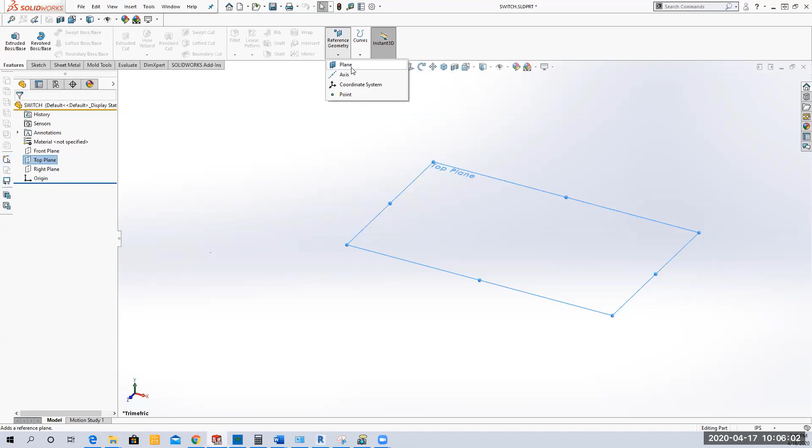All right. Now you may recall, for a loft to work properly, you need to have more than one plane. So we're going to create 2 extra planes, and we're going to make them parallel to the top plane. So I'm going to select the top plane right here in my browser, and then I'm going to go to reference geometry on my ribbon, and I'm going to select the plane tool. So I'm going to create some offset planes to that top plane. I've selected the top plane in the browser. Then I go up to the plane tool on the ribbon. I select plane, and I'm going to say I want 2 planes.

So I'm changing the number of planes, and I'm switching the offset so they're going below the existing plane. And I'm going to have them be 1 inch apart from each other. So you can kind of see that preview there, where I've got the top plane highlighted, and then I've got 2 planes being placed below it at 1 inch increments. And then I'm going to green check. So then over here, you're going to see the top plane, and then plane 1 and plane 2. And I'm going to make the top plane visible. So you see top plane, plane 1, and plane 2.

And because I'm doing a loft, and it's very easy to get lost and confused using lofts, I like to name my planes and my sketches so I can keep track of things. So I'm going to rename plane 1. I'll just press my F2 key to rename it, and I'm going to call this one middle plane. Okay, so I've got a top plane, and then I've got a middle plane, and notice it shows middle plane now for the name.

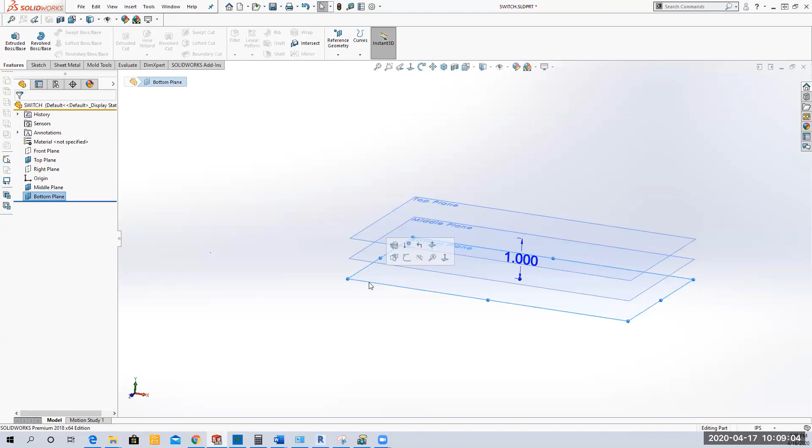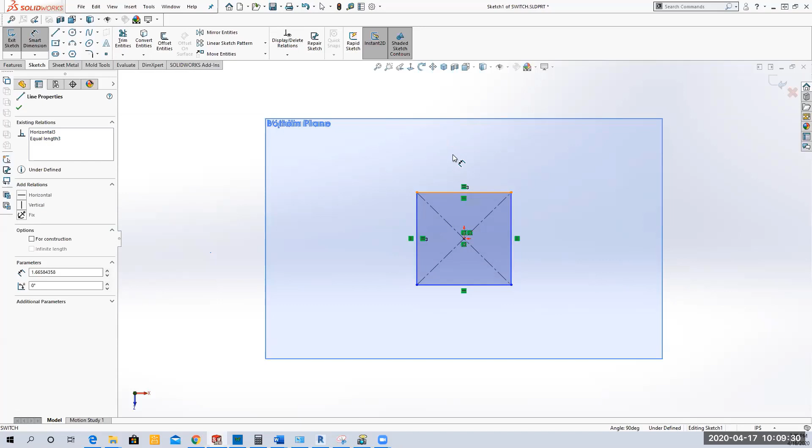And in the book, what she does is she has the planes go up, and that doesn't make sense to me because basically we're going to start down here and we're going to go up. So my first sketch is going to be on my bottom plane. Okay. So I'm going to select the bottom plane, and I'm going to say new sketch. And then I'm just going to use the center rectangle and draw a rectangle. And I want this actually to be a square. So I'm going to set the 2 sides equal. And I'm going to give it a distance of 0.5.

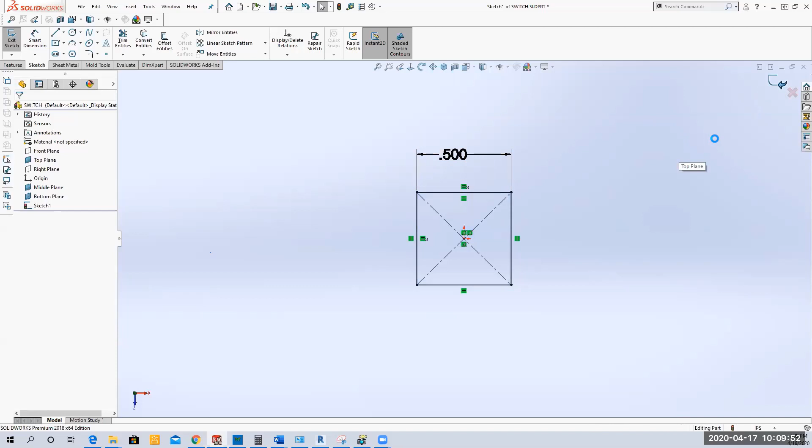And then you can see that it is fully defined because it's coincident to the center, 2 sides are equal, 0.5. And then I'm going to exit that sketch, switch back to an isometric view, and call this sketch... I'm going to call it bottom sketch.

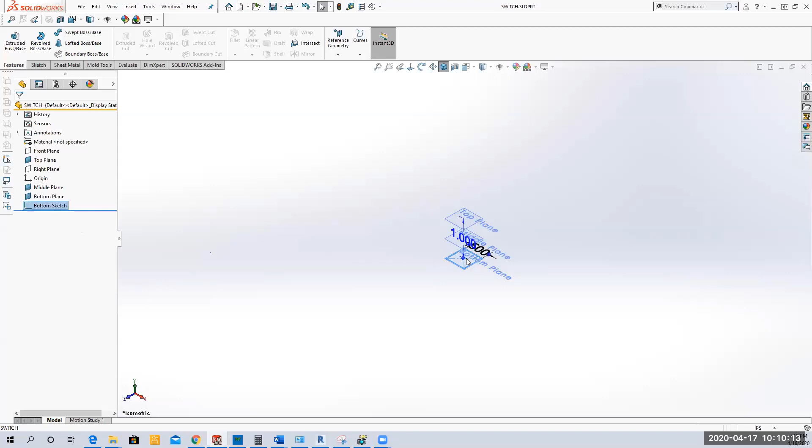Because it's on the bottom plane, and it's on the bottom. So at this point, we have 3 planes: top plane, middle plane, bottom plane, and we have a bottom sketch. Anybody lost? Anybody confused?

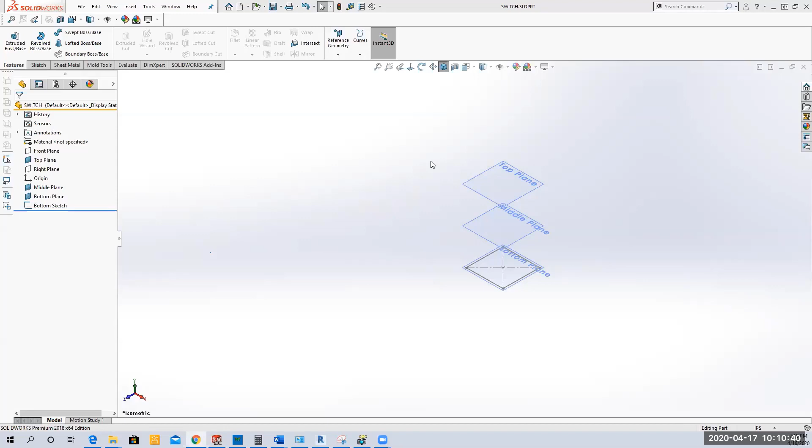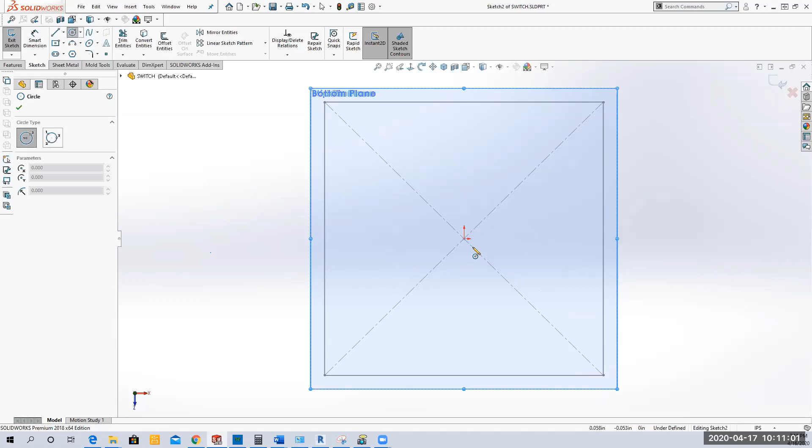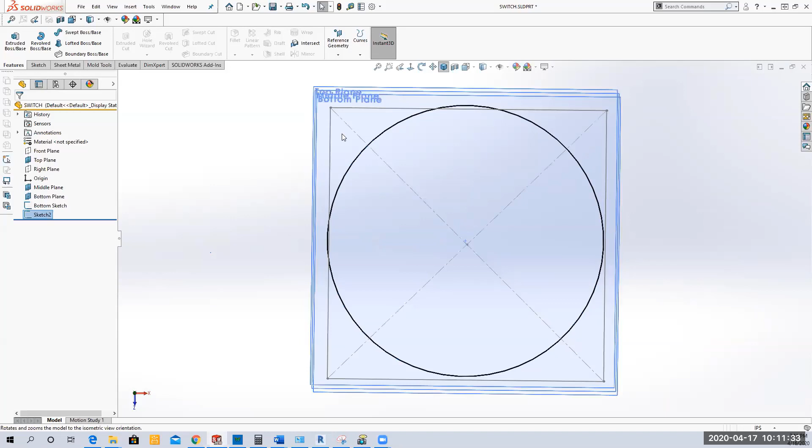Okay, now we want to place a sketch on the middle plane. I'm going to select the middle plane and go new sketch. Now I want to do a circle, but I want the size of the circle controlled by that square we just placed. So I'm going to select the circle, make it coincident to the center, then click up there and make it tangent. So I'm adding a tangent relationship between the arc and that line. So if the square changes, it's going to drive the size of the circle, because that circle always has to be tangent to the side of the square.

And I'm going to rename that sketch middle sketch, because it's on the middle plane. So far we've got 3 planes: the top plane, the middle plane, and the bottom plane. And we've got 2 sketches: the bottom sketch, which is a square that's half an inch square, and a middle sketch, which we don't have a size on, but it was fully defined because the size of the circle is driven by the size of the square. You'll see that in a minute. I'll demo it for you.

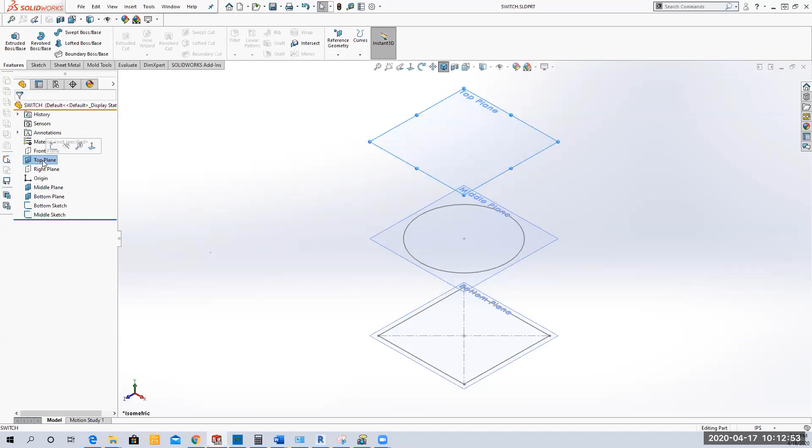Okay, so we have one more sketch, and that is, we're going to be on page 6-16, and I'm going to do the last sketch, so we'll have 3 sketches total, and that's going to be on the top plane. So I'm going to highlight the top plane, and say new sketch. And the instructions in the book are kind of confusing to follow.

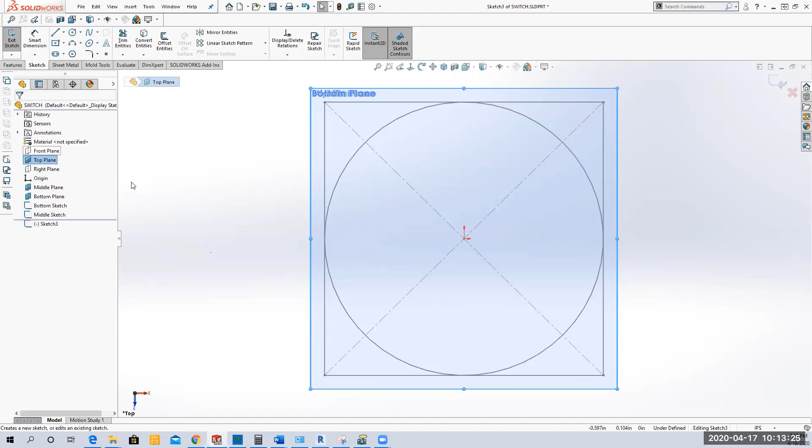What she's trying to do is create a smaller circle where she wants the size of that circle controlled by the bottom sketch. So how does she do that? First, she draws a center line. She selects the center line tool, and takes it from the center point all the way to the corner, this top upper corner. So even though I'm up on the top plane, notice I've got a coincident, and it's showing that it's coincident to that vertex of that bottom square. Do you see that? That means if the size of the square changes, the length of this center line is also going to change. So she created this relationship, if you will.

Now, the other thing she wants to do is, when we place a center circle, what are the 2 things Solidworks asks for? If I put in a center circle, it asks for the center point, which is going to be this origin here, and the radius of the circle. So I need to locate the radius point, and I want my radius point to be the midpoint of this center line. So I'm going to place a point using the point tool, right where the midpoint is. I'm going to place it right there, and notice it says midpoint when I placed it.

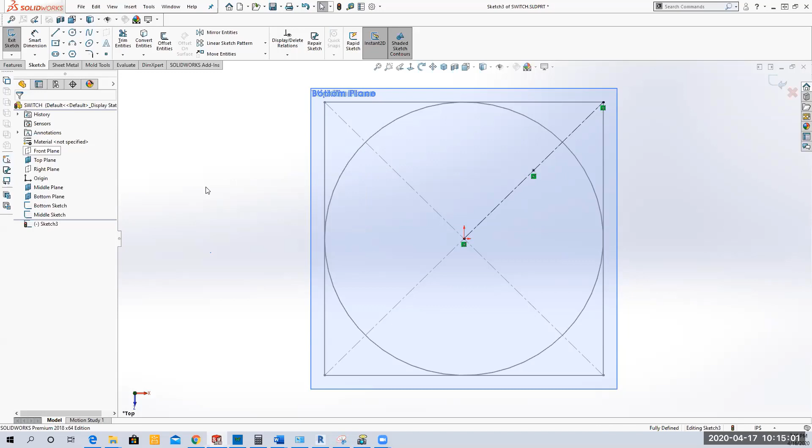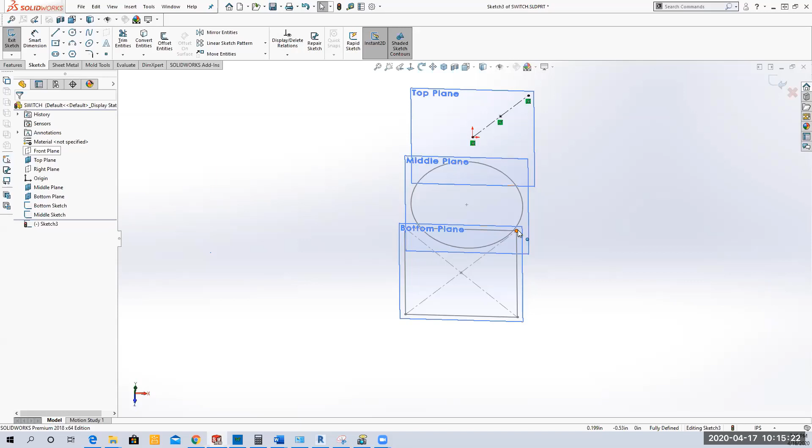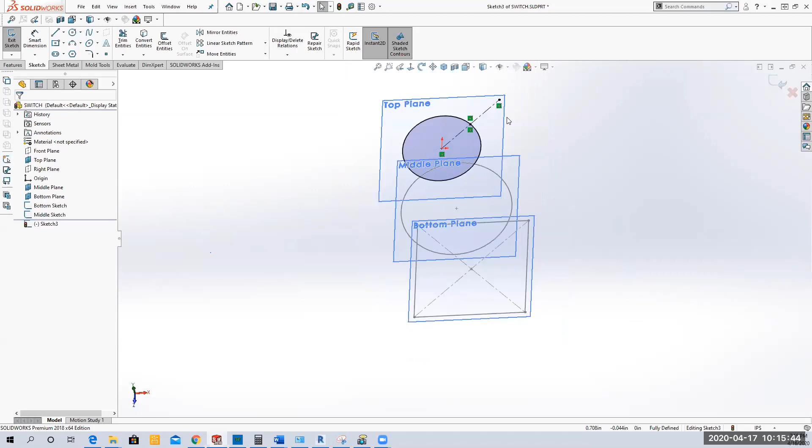All right, so notice all I've got so far is a center line and a point, and the point's located at the midpoint, and the center line starts at the origin and ends at this corner of the bottom sketch, because there's a relationship there. These 2 guys are lined up. So now I'm going to create this little circle, just like that. Notice that circle is fully defined, even though I didn't put any dimensions on it, because these 2 points had relationships there. So I'm going to exit that sketch, and rename it top sketch, because it's on the top plane.

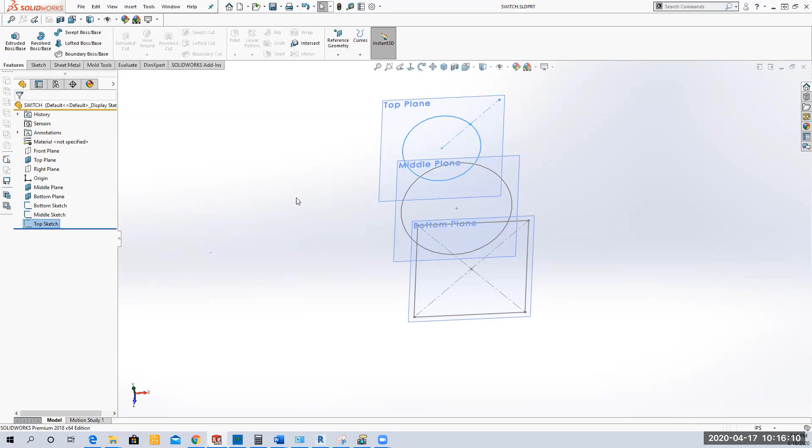And I obviously have no imagination. Okay, so I'm going to save it. And I'm going to turn off the visibility of the top, middle, and bottom planes because I don't really need them anymore. And you can see that I've got these three sketches. I've got the bottom sketch that's a square, I've got a middle sketch that's a circle, and then I've got the top sketch that's a circle.

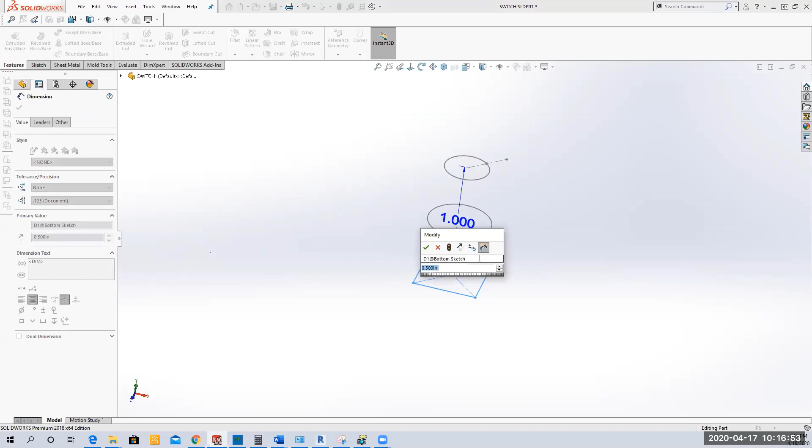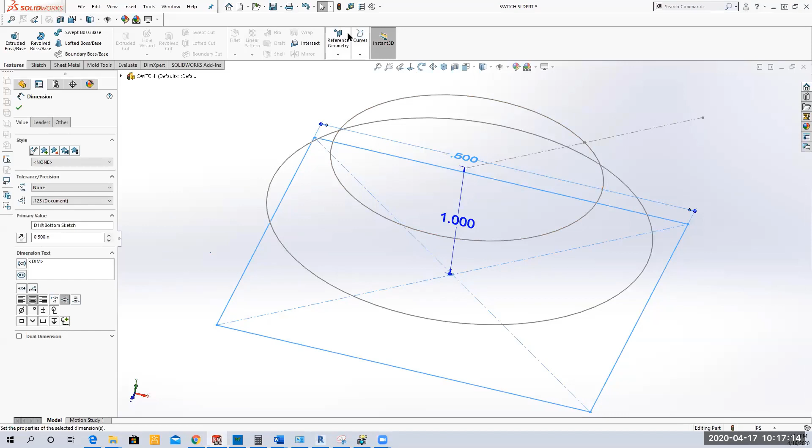Well, what if I change this dimension, this 0.5 dimension? You don't need to do it, you just need to watch me. I want to show you how the three sketches have relations with each other. So this bottom sketch is driving all three sketches. If I change this to 2 inches or 3 inches and then do a rebuild, look what happens to the other two sketches. Did you see how they got really big? Because they were controlled by the size of that bottom sketch. So if I change this back to 0.5 and do a rebuild, they go back tiny. See that? That square is controlling the size of these two circles.

And that's what these relationships were all about. Because if this circle always is going to be tangent to this line, it has to adjust the size if this size changes. Likewise, if this circle has this midpoint to this line, and this line is being driven by the length, and this distance here is based on the size of the square, this little circle is also going to adjust. So these three sketches have been designed so that they're all relating to each other.

Any questions about what I just did? Everybody's good. Okay, just did a quick pass down all the attendees.

All right, so now we're ready to do our loft. Our loft is right here, the lofted boss base. It's also called a blend, you may recall I talked about that. So I'm saying lofted boss base.

Did you have a question, Matt? No, okay. And notice you set your profiles here. Remember that PowerPoint I showed you, God knows how long ago that was, where I talked about lofts and blends? And I said you can use multiple sketches and then you can do guide curves. In the book, she doesn't show you how to do guide curves at all. Don't worry about it, because I'm going to show you how to do guide curves too. So you're going to have both, you're going to know how to do it.

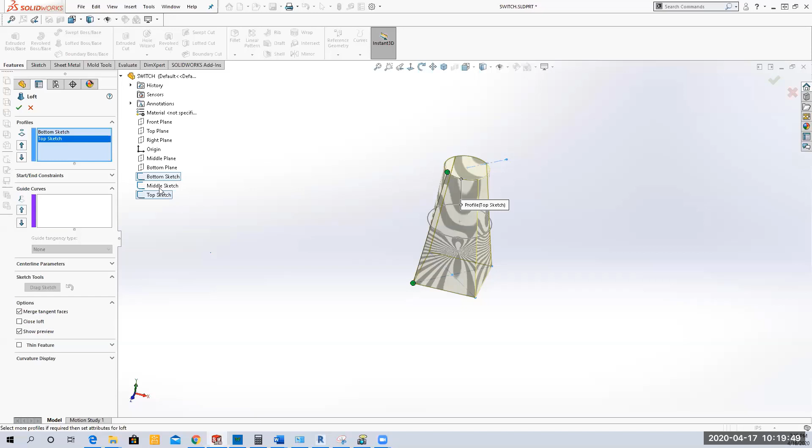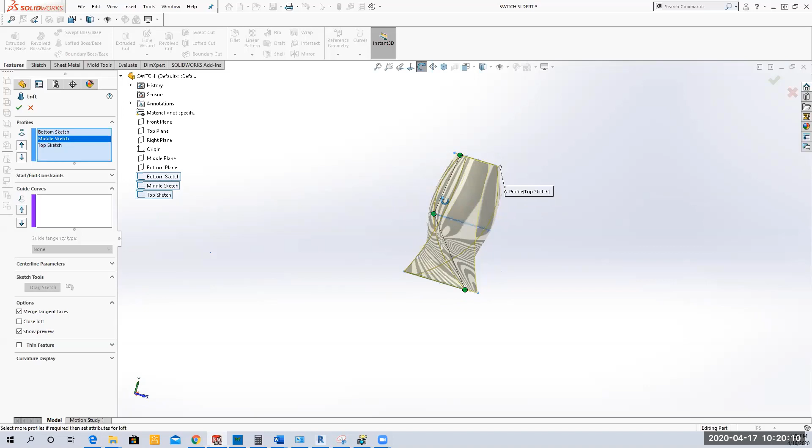So notice I have a move up and move down because the blend basically goes in the direction. And this is another thing, I can either select the sketches here or I can select them here. If I select the bottom sketch and then the top sketch, notice it gives me a nice preview, and it goes straight from the bottom to the top. But if I add the middle sketch, oops, I missed the middle sketch, notice SolidWorks gets confused because it's looping back on top of itself, so it's giving me an error. But I can use this move up key and then the middle sketch gets included, but it's all twisty, turny around. It's got these little chains to kind of help me adjust the size.

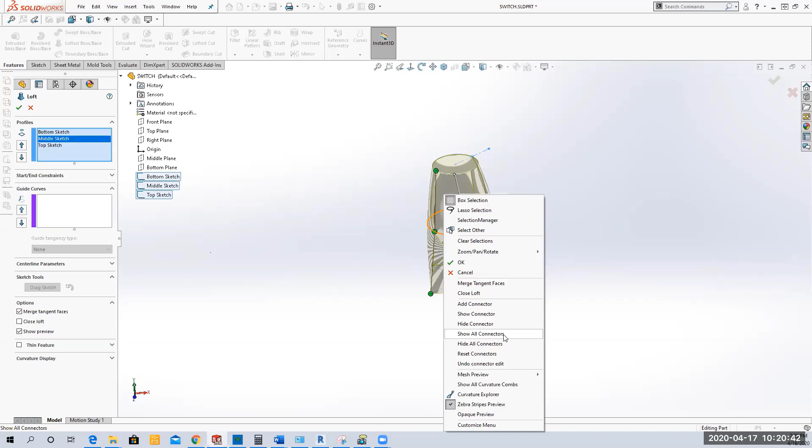Now if I want to see more of the chains, notice I can right click and say show all connectors. This is not in the book. I'll tell you right now, she doesn't show you a lot of these tricks. I want to show all connectors, so I'm going to click on that. And now I've got more connectors that I can use to adjust what my profile looks like. You can kind of move it around and it's kind of cool, so you can see what's going on.

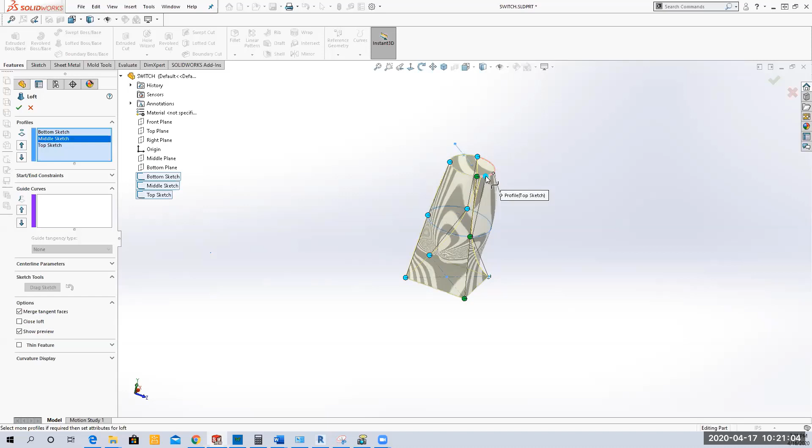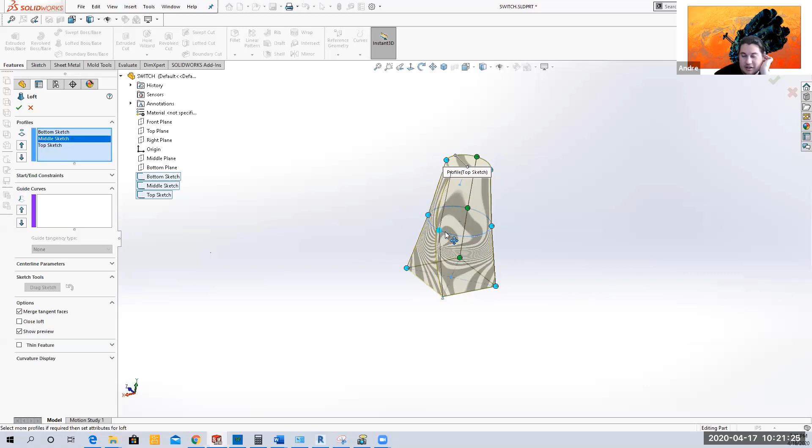I would just like to say I am so thankful you just showed me that button, because I've been lofting and basing and boundary while I was practicing the last couple weeks. That's probably the most annoying part, when multiple sketches can't connect properly. And now I have these, now I can see the curvature points or whatever you called them. Yeah, the connectors. Oh my God, thank you so much. Yeah, so stuff that she leaves out of the book, to me, is like, well, this is the fun part, right? If you don't have these connectors, they're not necessarily acting like guide curves, but I'm going to show you how to have even more control in a minute. Okay.

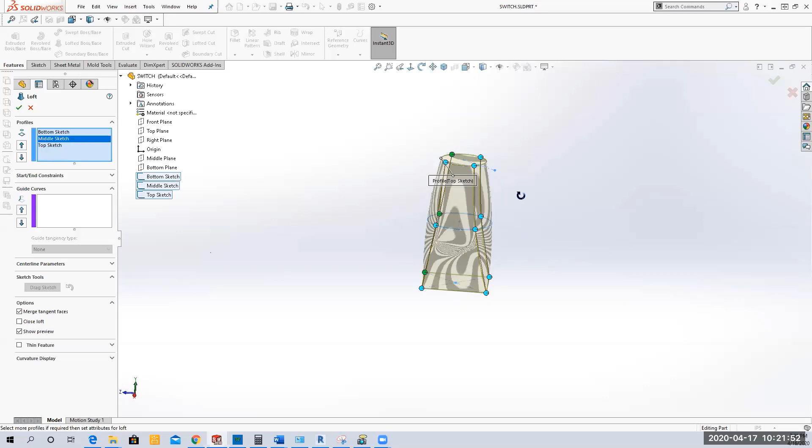This is really important when you're doing things like designing wine bottles, tennis shoes, a bike helmet, or a bicycle seat. These are all things that use lofts, and you need to have that kind of control.

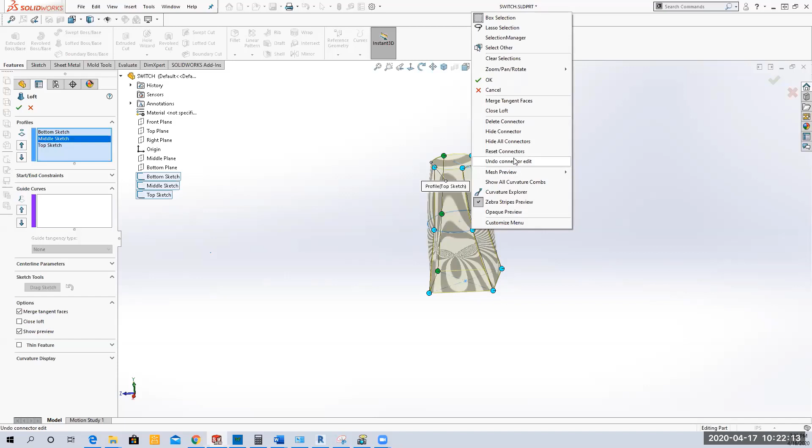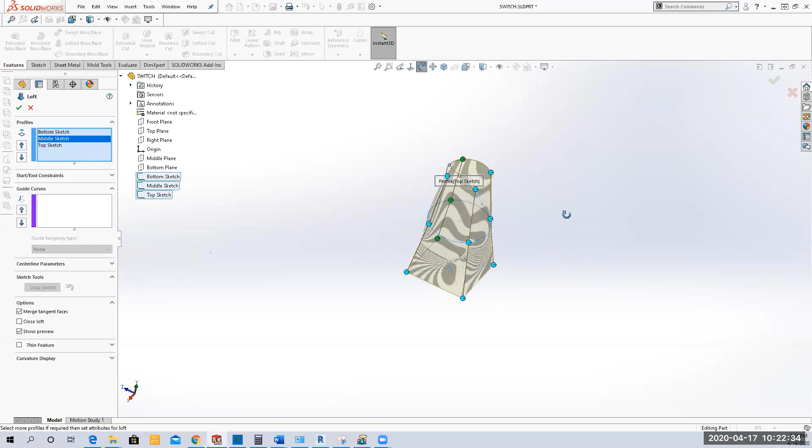So if you want to reset all the connectors, you can click reset connector, and it takes them to a default position. This is useful if you do something crazy and it looks way messed up and you can't figure out how to get out of the corner you've backed yourself into. You can just take them back to the default position, then green check. Now look how pretty it is. See that? You can use those connectors to make an adjustment.

All right, so I'm going to save. I've got my loft. At this point, you guys should have your loft, all right?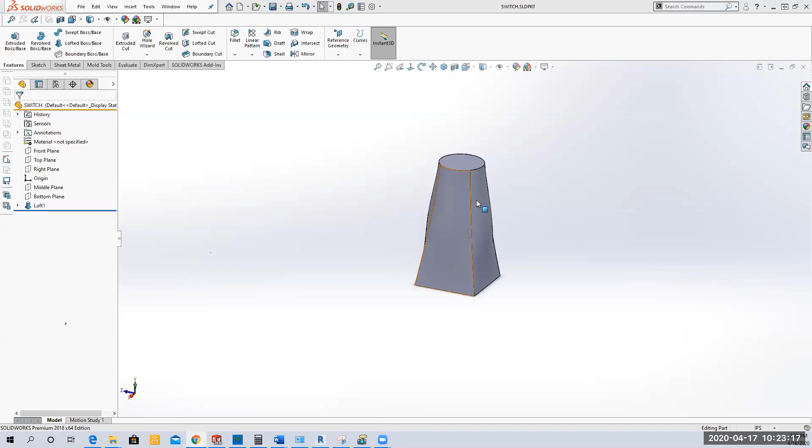And then she just finishes up on page 6-17 with a dome. We did a dome before, on the light bulb, I don't know if you remember. So it's the same thing we did before. We're going to select the top face here, and go Insert, Features, Dome.

Here's the thing, I want to uncheck where it says continuous dome, and change it to 0.2. The reason I want to uncheck continuous dome is because this is a loft. If you have continuous dome enabled - and she doesn't talk about this in the book - it's going to attempt to keep the dome tangent to the surfaces leading up to the dome, and that can create issues.

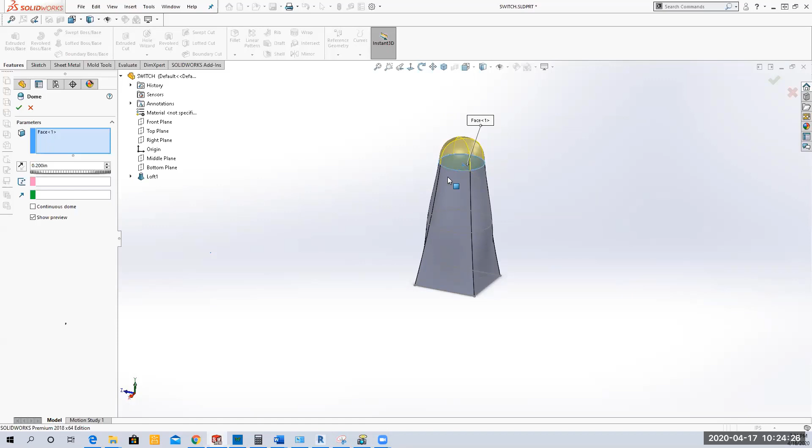So if you want it to look a little cleaner with a loft, it's usually better to uncheck continuous dome. I'm going to check right there, and there's my switch. So this is the way the switch looks in the book. And that would basically be the part, and this is where I would normally just say okay, we're done, and we can stop talking, blah blah blah.

But I want to show you how to do guide curves, because that's not in the book, and that's something I think is very useful, especially if you're going to do anything with a lot of lofts. So now I'm off script, and you're going to have to pay closer attention.

Now, you don't have to follow me, you don't have to do anything with me at this point, because you've got your switch part. This is all you need for your drawing. Make sure you look at Canvas for what I want you to do for your drawing, because the drawing is cinchy easy, just 3 views, okay, and a minimal amount of dimensioning because it's a lofted part. So make sure you check with Canvas before you do the drawing on this.

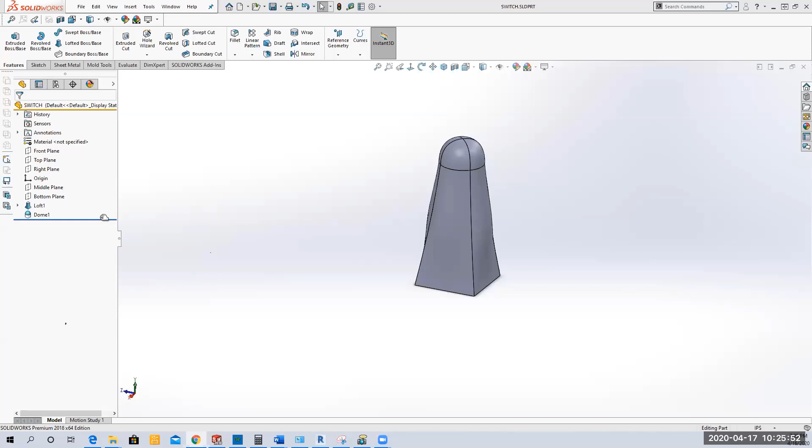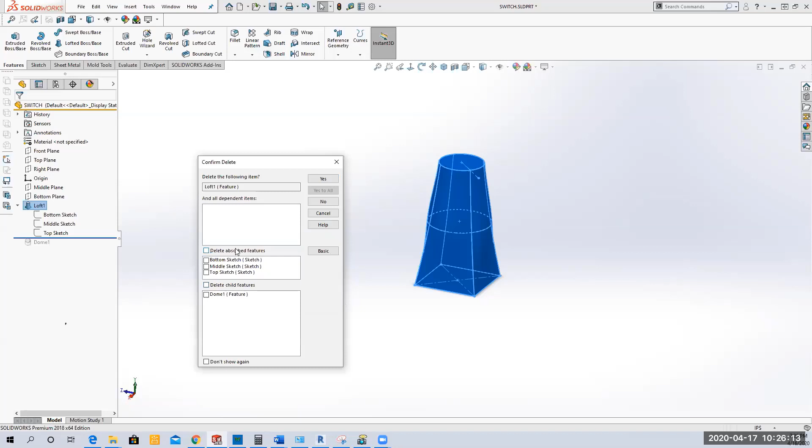So first I'm going to roll back the dome, okay, and then I'm going to delete this loft. And I don't want to delete the child feature. Will it let me? Don't want to delete... well, it's going to do it, so I'm just going to let it. Okay, so nope, it saved the dome.

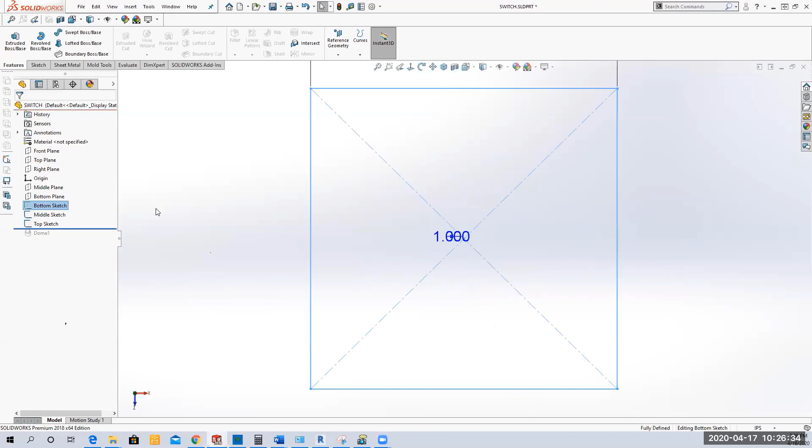So I've got my bottom sketch, middle sketch, top sketch again. But I want to do my guide curves. So what I'm going to do is go to my bottom sketch first, and I'm going to add a point in the middle of each of these lines. The reason I want to do that is so I have coincident points, or hooks if you will, for my guide curve. And I'm going to do the same thing on the circle.

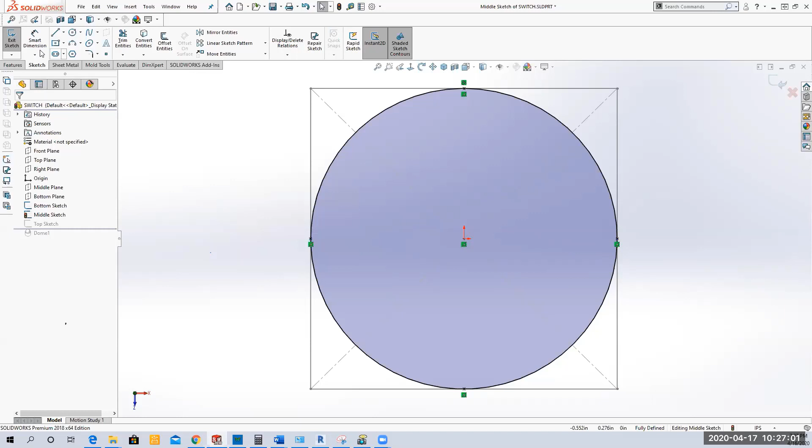I'm going to add points at the 4 quadrants of the circle, and I'm going to do that on my top sketch too. I'm going to draw a point at each of the 4 quadrants.

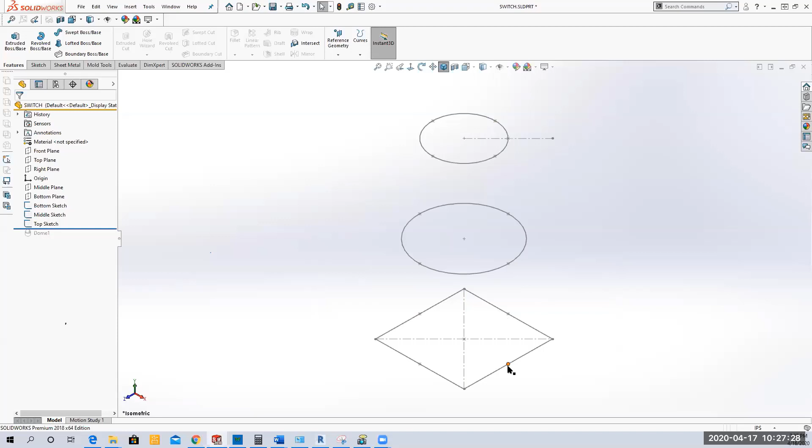And you can have as many guide curves as you want. I'm going to switch to an isometric view so you can see - I've got those 4 points on each side, do you see that? And the reason I put them there is, see how they're lined up with the right plane and the front plane? So now I can use the right plane and the front plane for my sketches, for my guide curves. That makes it a little bit easier for me.

Now, the more guide curves you have, the more you can define your geometry. So if I wanted to, I could say that I want a plane angled to the front plane, and there, I want an angle of 15.

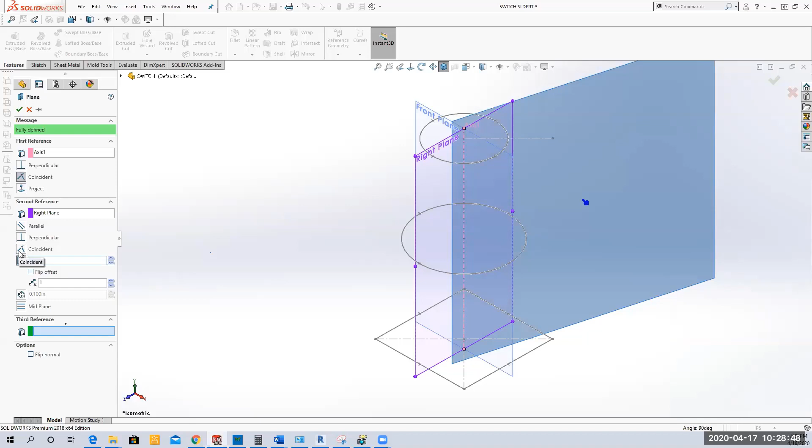Okay, I probably need to do an axis between these two guys. All right. And then I'm going to have to do a plane between the axis and the right plane. And if I wanted to do like 15 degrees, there's my 15-degree plane. So I could have a guide curve on this 15-degree plane, but then I need to add points all along that so that it has a hook to it.

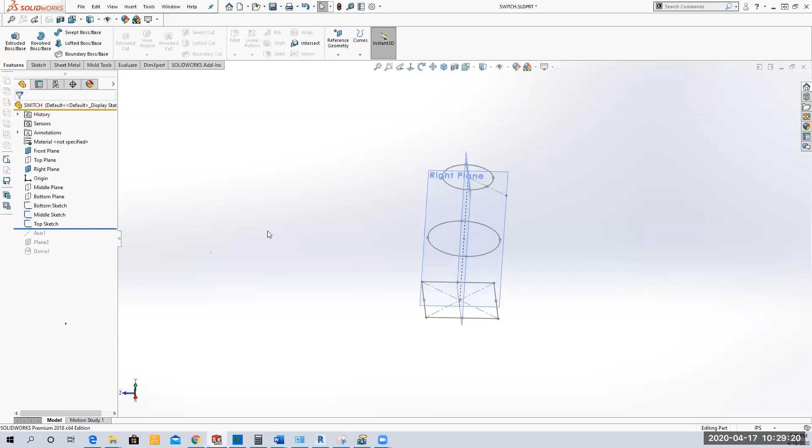So that's a little more complicated than I necessarily want to get, but obviously the more guide curves you have, the more control you have in how it's gonna look. So I'm gonna move that up a little bit, okay? So I'm just gonna do the right plane and the front plane. I didn't delete plane 3 just in case somebody decides to be a wise guy and asks me to use that extra plane and to see how it's gonna look.

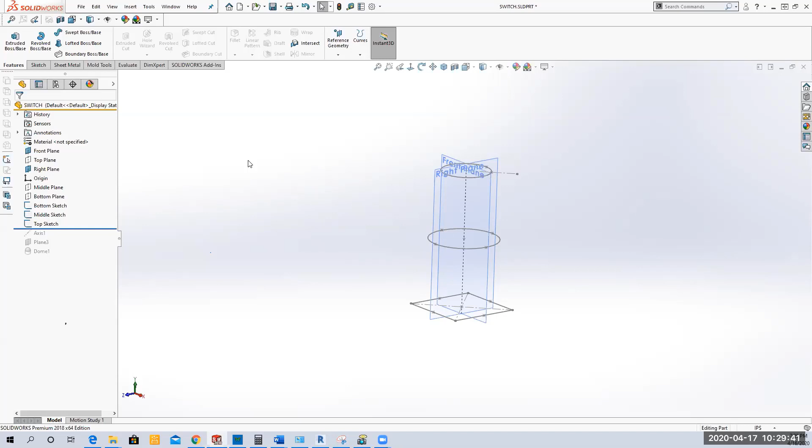So remember the rules for guide curves: 1 guide curve per sketch. Okay, this is where a lot of people get messed up. So I'm gonna start on the front plane. I'm gonna go new sketch. And I'm gonna use the line tool, and I'm gonna draw a line from here to here to here. And I'm gonna exit out. And I'm gonna call this guide curve 1. Okay, and you see how it's connecting to this point, and this point.

All right, so this is where a lot of people think they're gonna get cute, and they're gonna say, well, why don't I just mirror this line over to the other side on the front plane? Because then I'd have less work, right? Except remember, the rule is 1 guide curve per sketch. So you can't do that.

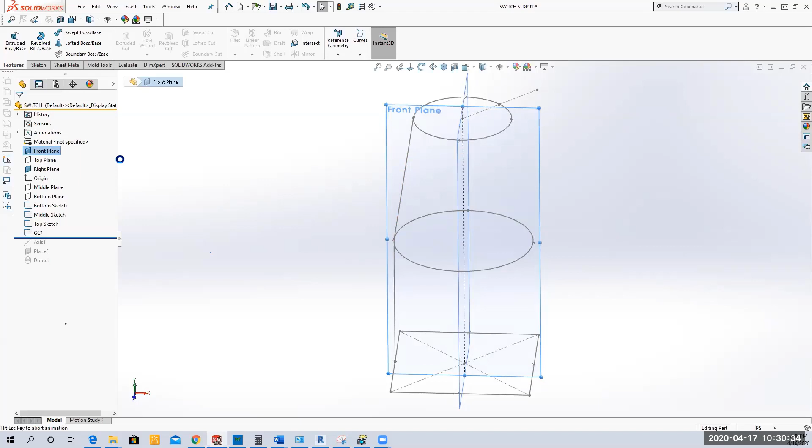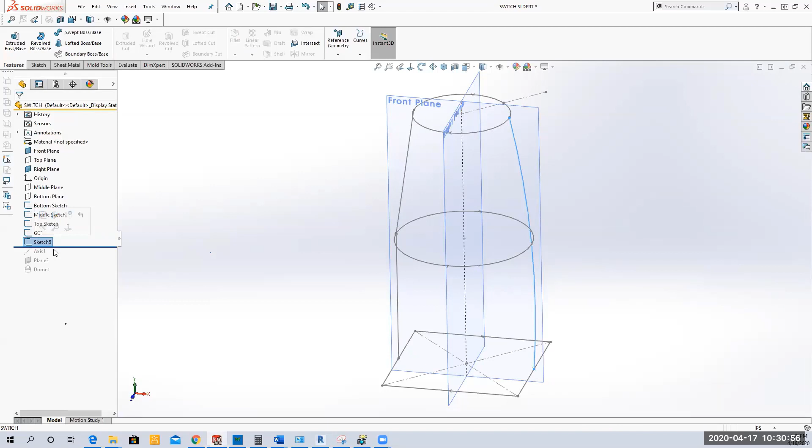Okay, so I'm gonna go front plane again, and this time I'm gonna do a 3-point arc. So I'll say I'm gonna go from here, okay, to here, to there. Okay, there's my 3-point arc, and I've got a line. I'm gonna exit that, and I'm gonna call that guide curve 2. Okay, so now I've got 2 guide curves.

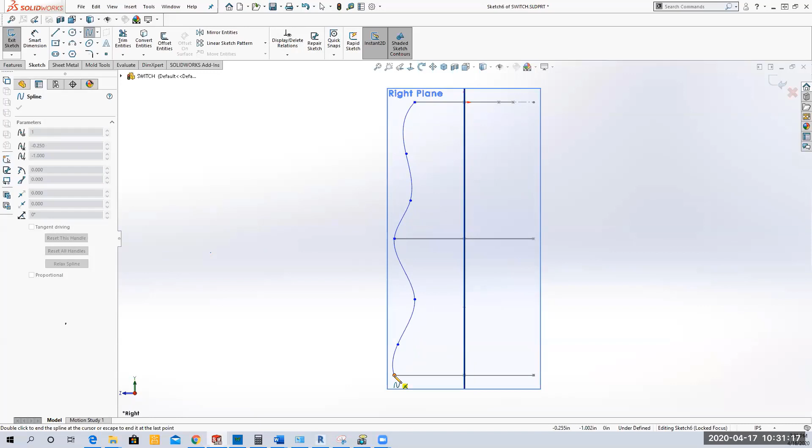Now I'm gonna go to the right plane. I'm gonna do a new sketch, and this time I'm gonna do a spline. So I'll get very cutesy. Okay, so this is the Coca-Cola bottle, right? Or the Pepsi bottle, you know, or liquor bottles, right? They get more interesting with their shapes. I'm gonna exit that, and I'm gonna call that guide curve 3.

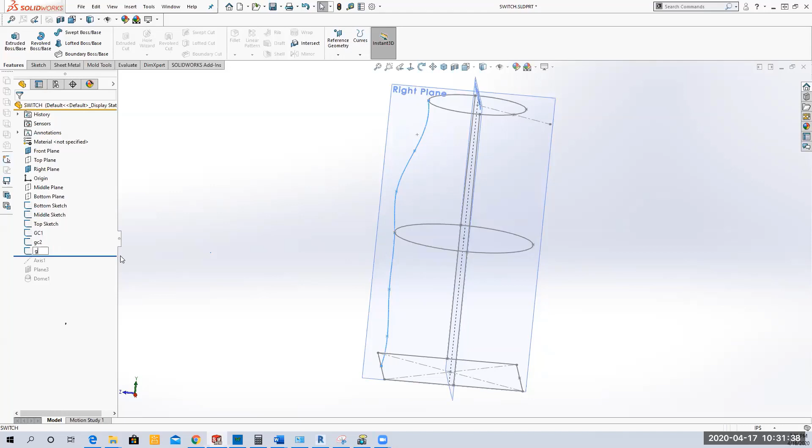Okay, and I can do 1 more guide curve, and I normally leave it up to the class if it'll be a line, an arc, or a spline. So I think I can do a poll. I'm going to ask a question. Okay, poll 1. Guide curve 4. What should I use for my 4th guide curve? A line, an arc, or a spline.

Alrighty. And there it is. Where's my poll? Okay. There's my poll. Trying to... poll 1. How do I present it? Let's see. And that was my question. So how do I get that poll out to you guys? Let's see. There it is. Save. And delete question 2. Save. Okay. So I've created a poll. Launch polling.

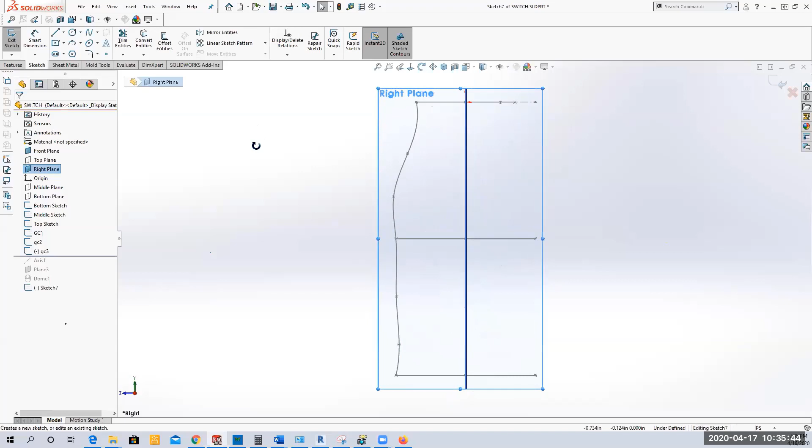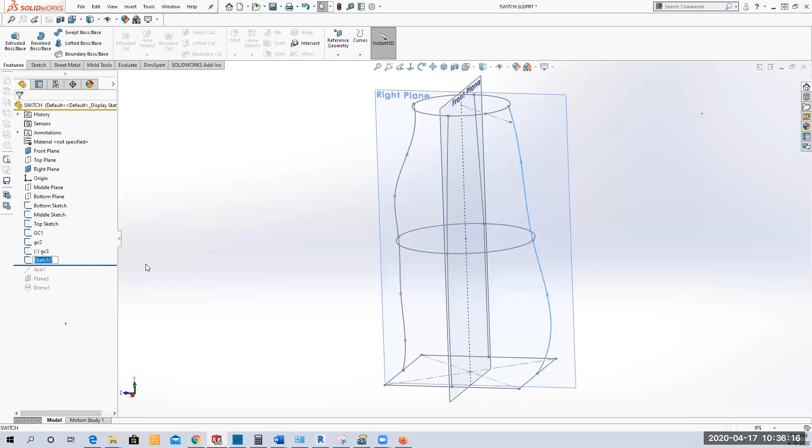Okay, so I'm going to go to the right plane, do a new sketch, and draw another spline. When you did the sketches for the guide curves, did you just keep on re-clicking right and front plane? Yeah, I just had to select each plane. Remember, each guide curve has to be in its own sketch. So I had to each time select the plane that I was going to place the sketch on and then draw that sketch. Yeah, I just missed that very beginning part. But okay, just re-click. Yeah, every guide curve is its own unique sketch. So I've got 4 separate sketches there.

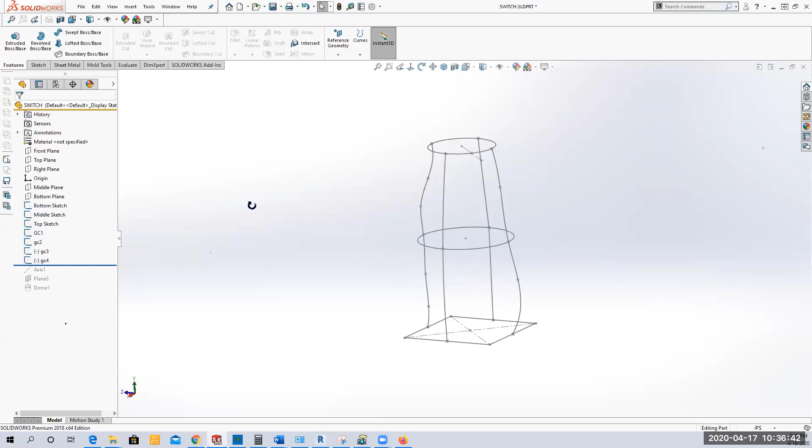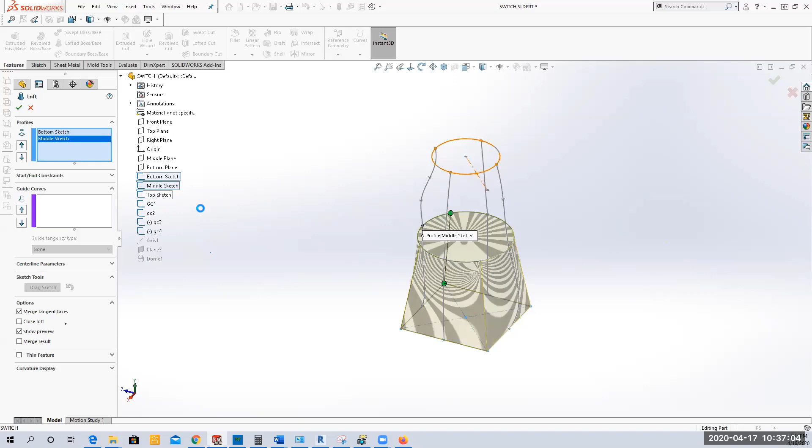All right, so now when I do my loft, once again, I select my profiles. So I select my bottom sketch, middle sketch, top sketch. Okay, but notice it's kind of ignoring the guide curves. I don't know if you can see that. See how it's not doing anything with these guide curves here? Okay, so what I'm going to do is add the guide curves down here.

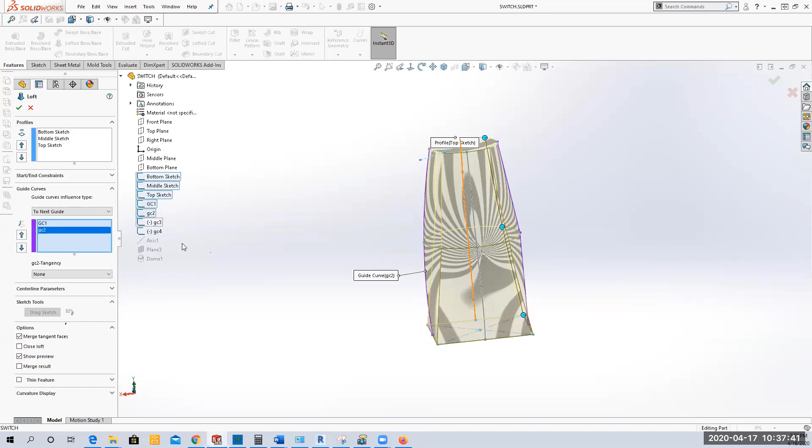I'm going to select guide curve 1, and notice as soon as I select guide curve 1, do you see how it's using that guide curve to change the profile over here? And then I'm going to add guide curve 2. See how this guide curve changed the profile? Now guide curve 3. See that? And then guide curve 4. See that? And then I'm going to green check. See the difference?

This is where you do a hair blow dryer, a hair dryer, right? Or a shaver or razor. Those are shapes that are created using Loft. Okay, so it gives you a lot more help.

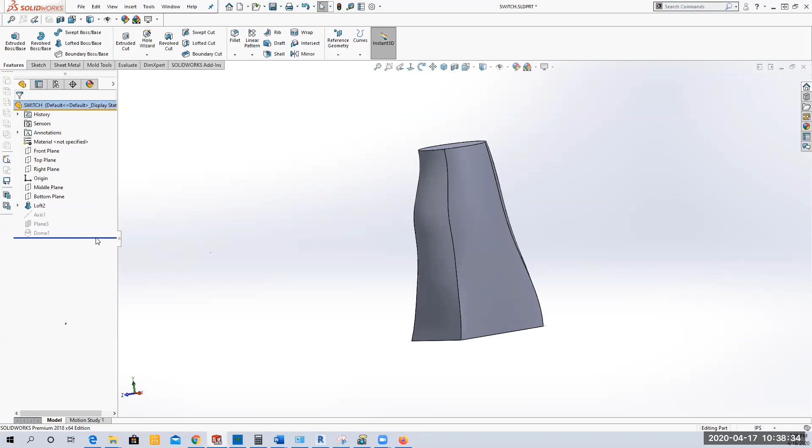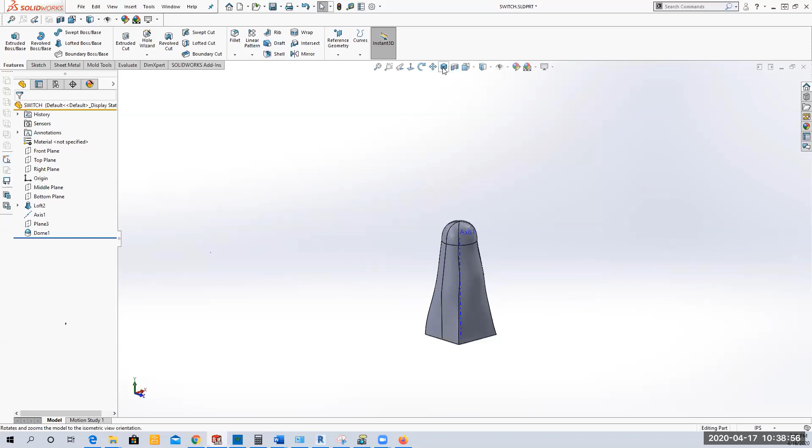So then I can just come down, and my dome, I need to reselect that face because that face went away. And there's my dome. Okay. Whoops, I don't need that sketch. I don't want to sketch there. So now you can kind of see the value of guide curves, right?

And that's basically the switch. How exciting that is. You know, I redid the whole exercise just now really quickly just to do that. And I put in my guide curves and everything, and actually it said loft operation failed to complete.

Okay, so the first thing I'd want to know is, one, if each guide curve is its own sketch. And the second thing is, remember, it won't work if you don't do these in the right order. So if you did top sketch, bottom sketch, and then middle sketch, it doesn't like it. Is that the same for the guide curves too? The guide curves, it doesn't really care what order you do the guide curves.

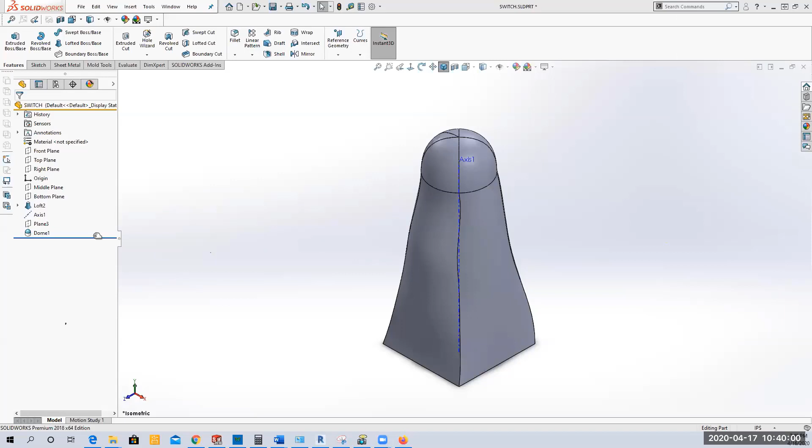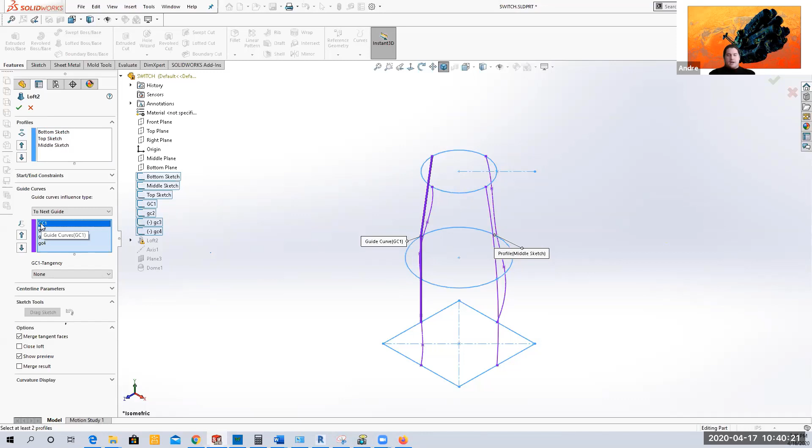So, but remember when I did the loft, if I move my middle sketch down, it's going to give me an error. Guide curve number 1 is invalid. And that's assuming that I don't have that. I have a full preview. It didn't do exactly what it did on your screen when you didn't put them in order. Yeah. I think just maybe one of my splines was way too complicated or something. It might have been that.

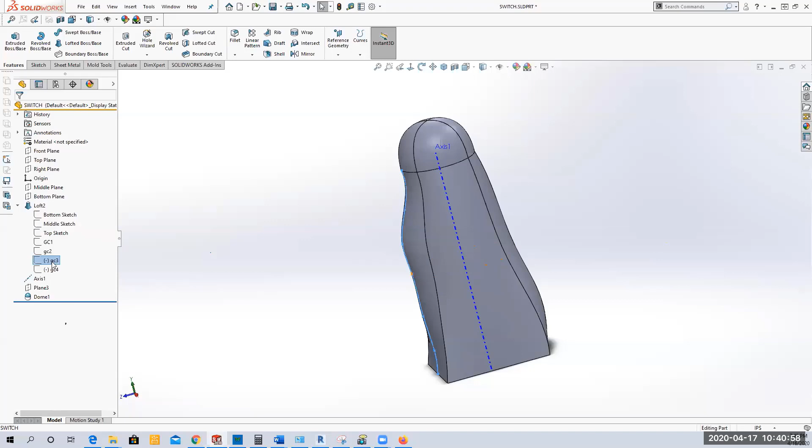Also, remember, it's really important that the guide curve hits at least one point in each sketch. So if you didn't remember, that's why I had those extra points on the top, middle, and bottom sketch. So if your guide curve, let me come over here. If I take my guide curve and I get rid of this point right here and move it off, okay, that's really obnoxious.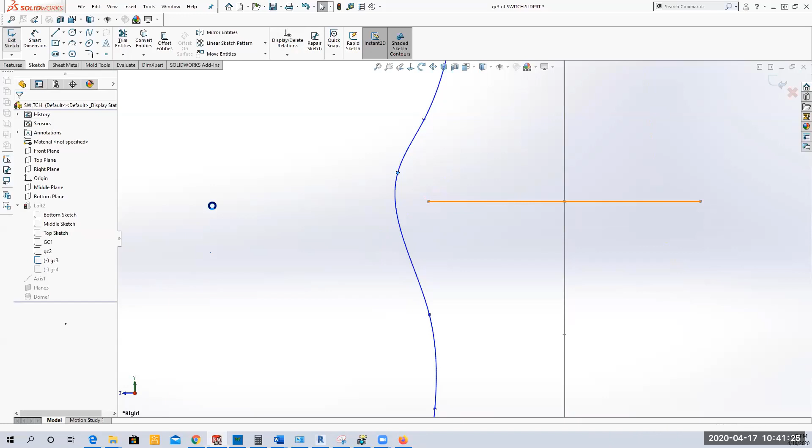Okay, I could get an error on that. Because see how this guide curve is no longer hitting this sketch? I can get an error on that. It accepted it, but it could have just as easily said no. So especially with splines, they're so funky. Yeah, it looks like my splines were underdefined to the point where it didn't want to do it.

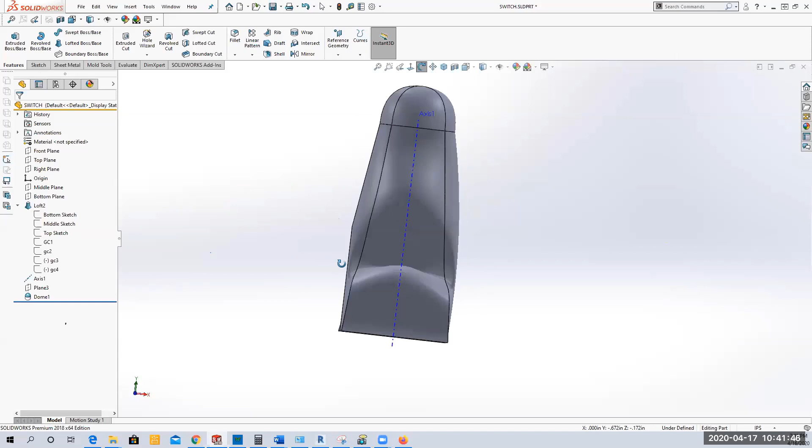So. But you can get some really cool, look at that with that guide curve when I put it in like that. It's like you can get some really obnoxious shapes. Completely agree. Okay.

So that is tonight's lecture. Yay. On Tuesday, I will be doing the lens cap, which is on page 6-20. Okay, so you have that. I will be grading your homework this weekend. And then I'll have the lectures from Tuesday night and hopefully tonight uploaded, so you'll have that. And you have quiz 2 and quiz 3 to work on. Any questions before I hand you off to Elsa?

So it's kind of like a general question. Well, one of the biggest things. If you want to go, Zach, it's cool. I actually have like a long. I just had a question about if you could go over putting the tables into the O-ring sweep exercise again, because my computer crashed when I tried it on Tuesday.

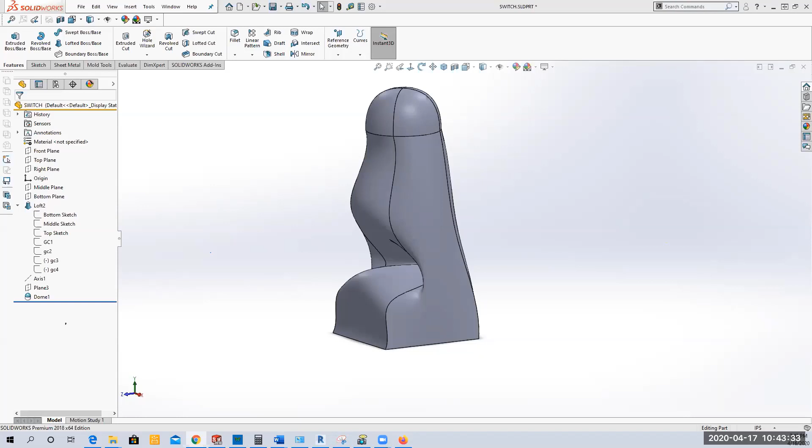Okay, let's see if I can. You want how to get it in on the drawing sheet? The tables where we made the small, medium, and large size. How to do the design table? I think it's the design table, yeah, because when you tried it, it crashed, and my computer did the same thing. Okay. But I was trying to reboot my computer when you fixed yours, and I didn't catch that. Okay, so let me see if I can get my O-ring. All right.

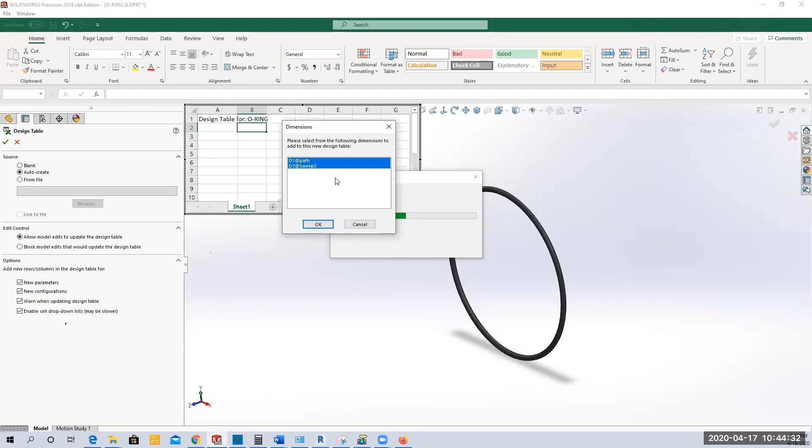So let's see if it'll let me insert a design table here without crashing. So I'm going to go Insert, Tables, Design Table. Okay, and then I go green check. And then it's going to give me the 2 dimensions. And I hold down my control key to select those 2 dimensions. And then I say, okay.

And then I'm going to type in my sizes: small, medium, large. And they were 100, 150. Oh, and I have to make sure that I use the millimeter, or it's going to create issues. And 200 millimeters, and then 3 millimeters, 4 millimeters, and then 5 millimeters.

And then I'm going to left click outside of the table. I'm going to save, and you can see the design table there. And I'm going to say okay. But it's not giving me the new sizes. That's really weird. It's some kind of bug that I have not seen before.

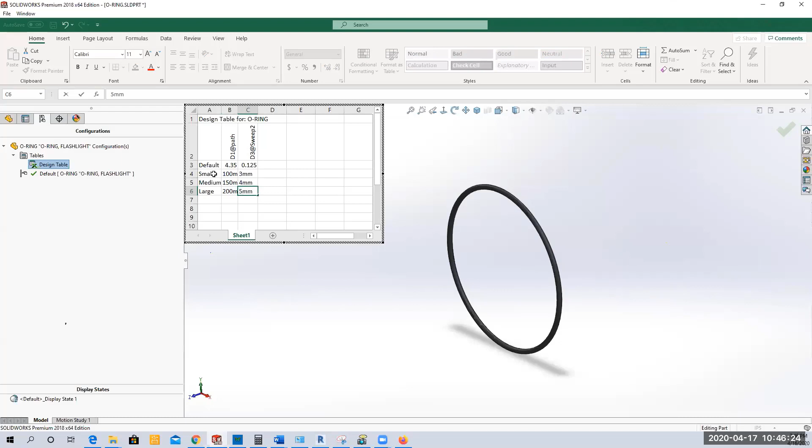Are you editing the design table right now? Yeah, basically I'm redoing it. This is where it crashed last time. And I'm not sure why it's not accepting the design table. I'm going to crash my SolidWorks.

So now would be a good time for my question. Sure, while I'm rebooting the SolidWorks. Yeah. So one of the biggest pluses about this class I was really hoping for was being able to 3D print something, and obviously that's kind of off the table unless I get a hold of, I think it's Rick and Levy from the Fab Lab. But would you be able to put a link somewhere or some kind of tutorial that's easy to follow for making something simple and putting it into a 3D printer, even if it was the same project you did with that last student where you guys made the ear plugs for his earrings?

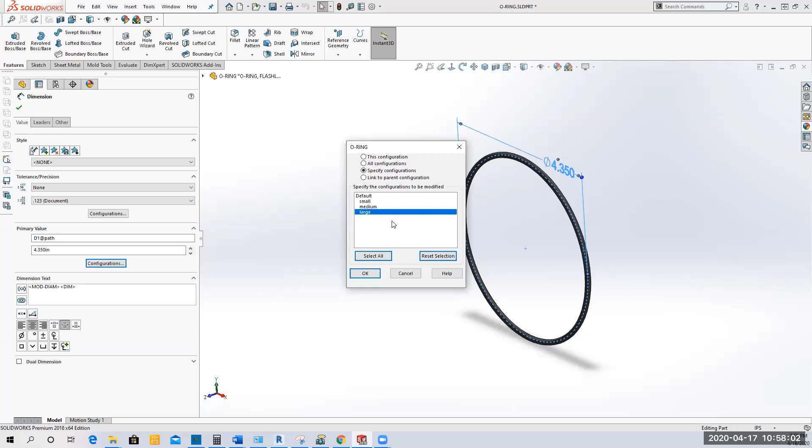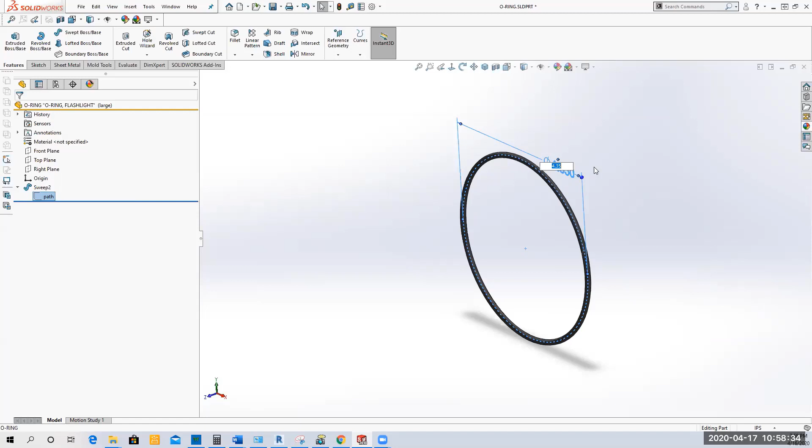So if I go to the path, I can click on this dimension and click on configurations. And I can specify for each configuration what I want it to be. So I can say for the large configuration, or I can select all and say okay. And so for the large configuration, I need to make sure that I'm in the large configuration, and I'm gonna click here, click that, and I'm gonna say configure dimension.

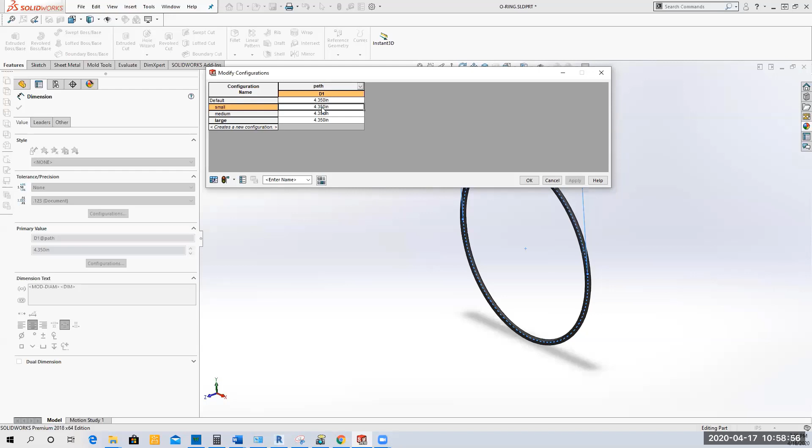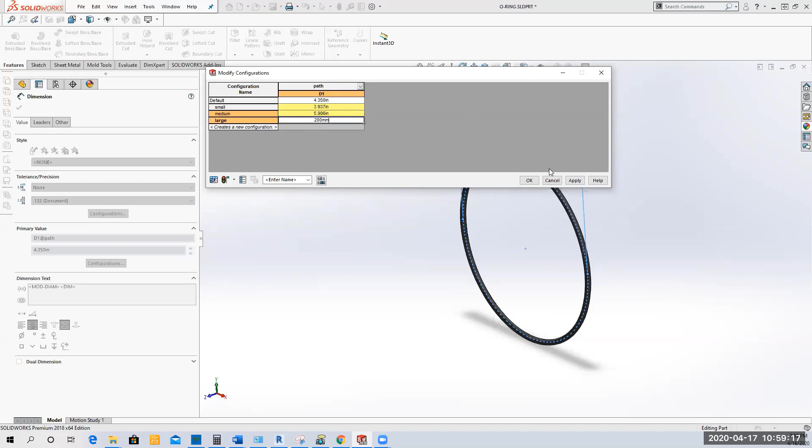And notice it gives me the 3 dimensions now. And so now I can say for the small dimension, hopefully it'll let me edit it, 100 millimeters, and then 150 millimeters, and then 200 millimeters. So that's my workaround. And notice it applied it.

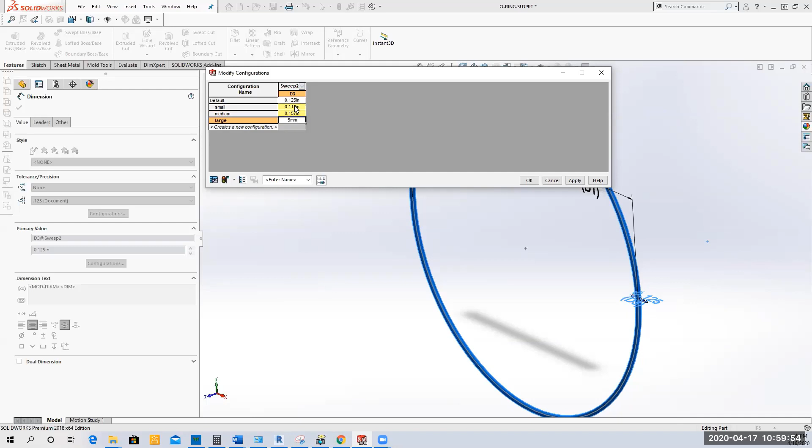Okay. Now I also have that sweep dimension. So I'm going to say I want to configure that dimension. And it shows me the dimension for that small one. For the small, it's going to be 3 millimeters. Medium is going to be 4 millimeters. And large is going to be 5 millimeters. And I'm going to click apply, and I'm going to save it. So now when I show a configuration, it adjusts the size. So that's my workaround when my design table is crashing and messing me up.

But this is still if you have Excel to use the table at all. Well, I wasn't using Excel here. Yeah, but you had made a table at first. Right, I made a table at first, but I wasn't accessing that table because it was crashing every time I tried to use the table. You can see the design table, but if I try to edit it or do anything to it, it's going to crash or freeze my SolidWorks for some reason. So this was my workaround for not actually using a table. So if you didn't have Excel, you could do it that way, and you would not be using Excel.

Could you post this part on the YouTube video so we can follow along when our computers aren't crashing? Yeah, I'm going to work on it this weekend and get it edited in Camtasia, and you should have it available to you. Thank you. Okay. And I appreciate the question. I appreciate your patience while I was trying to troubleshoot all of this, because I'm learning too.